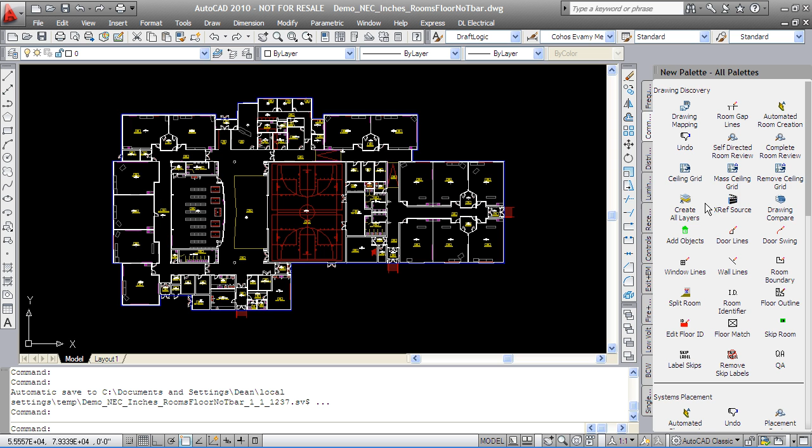So the first tool we'll look at is our mass ceiling grid tool to quickly put ceiling grid into the rooms that need it. We simply select the horizontal and vertical size of the grid, advise DraftLogic that we want the middle of each room used as the start point of its grid pattern, and that we want a zero rotation angle for all the grids.

DraftLogic Electrical goes through each room in the drawing and puts grid into only those rooms that need it. We see here we have a classroom that specified a ceiling type of T-bar. A neighboring room, this vestibule, specified instead that it had a ceiling type of drywall, so no ceiling grid was applied.

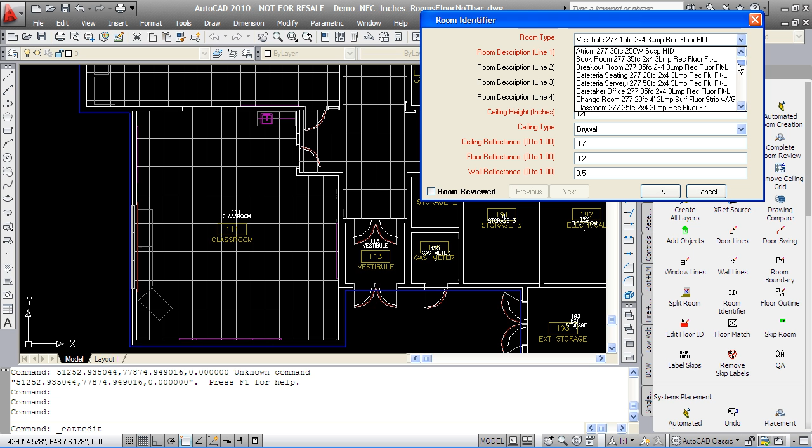Room types have been assigned to each room to let DraftLogic know how you want it treated. In this list here for the school, we've got a subset of our over 1,450 rooms available for selection.

Let's see how our room type selections affect DraftLogic Electrical's automated placement function. Automated placement will go through the drawing to each room that you have set up, and depending on which systems you choose to execute, in this case we're going to ask for both fixtures and receptacles to be executed.

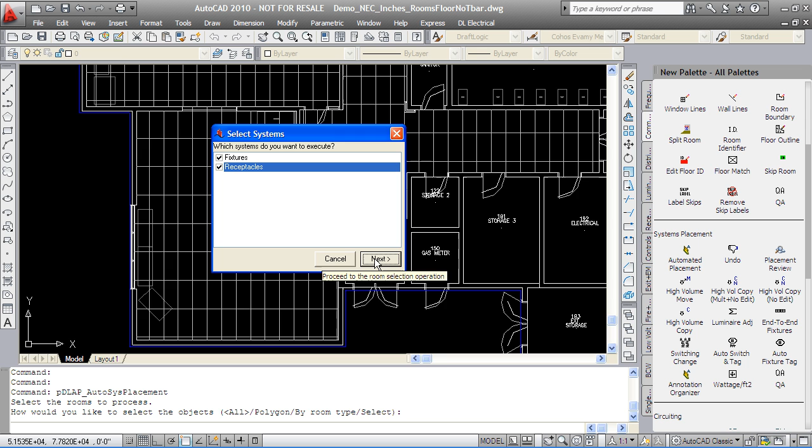And then based on what we've chosen in our room library, it will go through and place the lights and receptacles that we have requested.

So here we are now with automated placement complete. It took 2 minutes and 21 seconds to put lights and receptacles into 73 spaces.

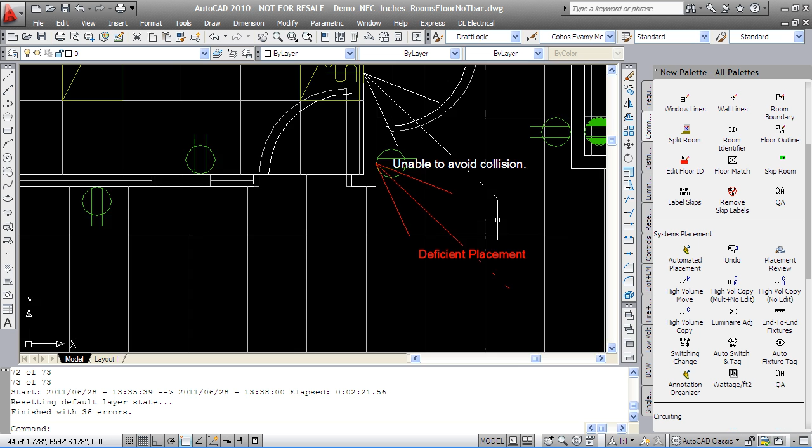Where there was a situation that DraftLogic Electrical was unsure of one of its placements, it has marked it with what we call an error or warning arrow to let you know to take a look to make sure you're happy with the placement. So how did DraftLogic Electrical know how to treat each space?

Let's take a look at one of our classrooms. We'll use our Show Room Record tool to call up the room library. As I mentioned before, we have over 1,450 room library definitions ready to go for you. They're all shown in this list.

But we're interested in this classroom's definition. So for this classroom, we selected a recessed fluorescent flat lens to be used for the foot candle based lighting and to light the space to 35 foot candles.

Calculations were made using the reflectances that were individually decided for the room, plus the characteristics of this particular fixture. And we can click on the View Detail button to get a quick view of it.

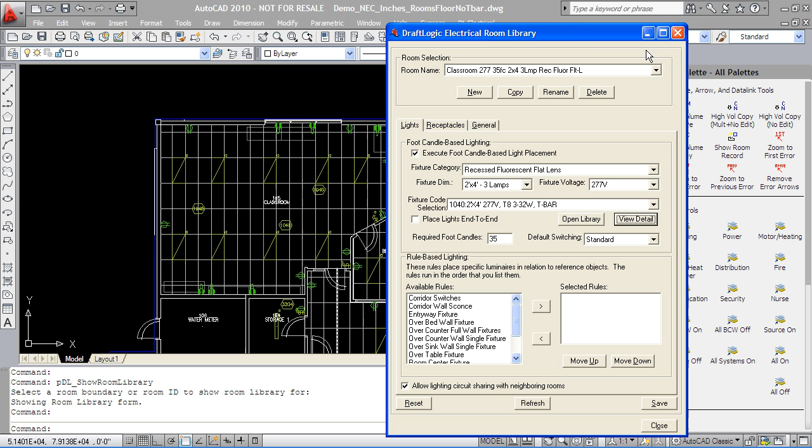We didn't apply any of our lighting rules in this particular room, but there's a number of them to choose from. And our receptacles, for the room perimeter, we chose to have duplex receptacles rated at 100 watts with a maximum distance between them of 240 inches.

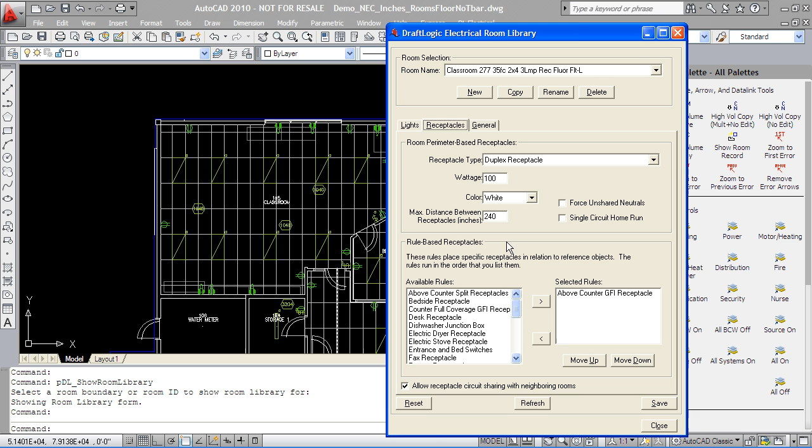We also applied an above counter GFI rule. You can see here that each of the counters received a GFI receptacle with a load of 1200 watts. We can adjust this as we desire.

And here's one of our room perimeter receptacles at 100 watts. And again, we can adjust this as desired.

So there's the results of automated placement. If you want to change those results, we have some high volume move and copy tools to make it quick and easy to do it.

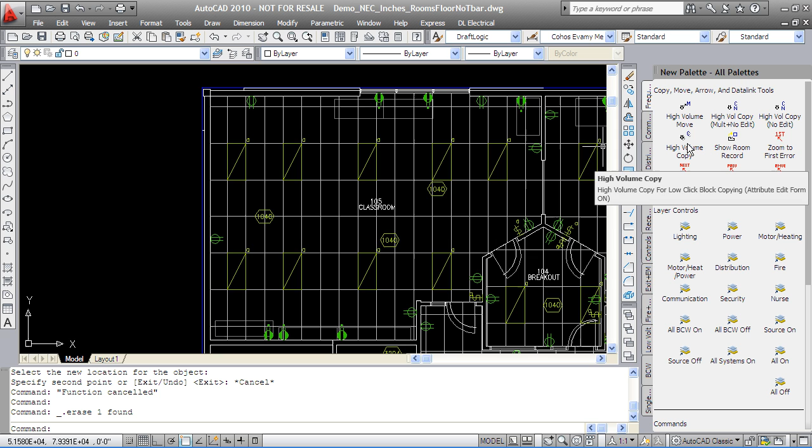These high volume tools know what kind of block you're picking up and what mounting style it has. So there's some intelligence here.

For example, if I pick up this luminaire and move it into a neighboring cell, all I have to do is just click anywhere in the cell, and DraftLogic Electrical will automatically snap it into the cell for me.

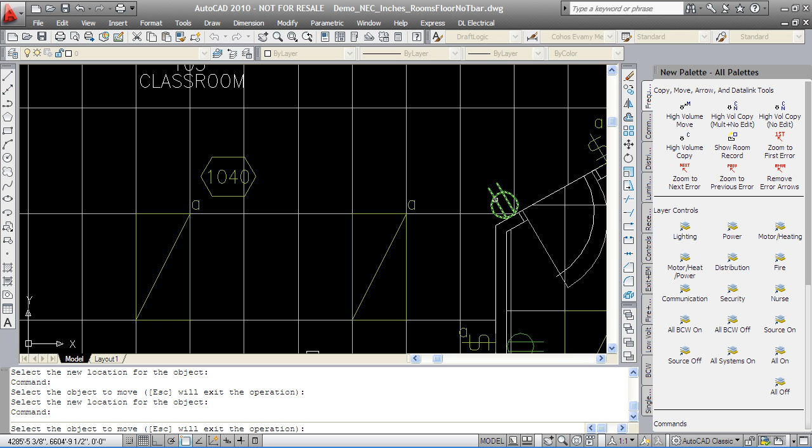If I want to move this receptacle onto this slanted wall face by the door, I just click anywhere near where I want it to go. It'll find the nearest wall, snap to it, and match the rotation of it.

If you want to tweak how the lighting was applied to one particular space, so you don't want to rerun all your classrooms, you just want to rerun one, then we have a luminaire adjust tool.

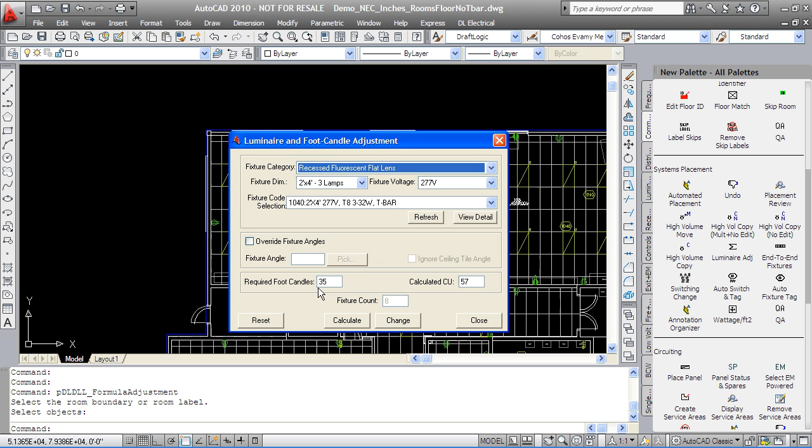So I select the room that I want to affect. Let's say I want to have this room lit to 50-foot candles instead. I could change the fixture type, I can change the foot candles, I can change the rotation angle, I can force a different coefficient of utilization.

In this case, I've just changed the foot candles, and as you can see, I ended up with another row of luminaires to increase the lighting level in the space.

This is a good time to mention that we are running DraftLogic Electrical straight out of the box. Everything that you're seeing is as installed. There's no configuration necessary to do any of what I'm going to show you today.

This is unlike many other design products that require anywhere from tens of hours of configuration to hundreds of hours of configuration, and still don't achieve anywhere near the productivity gains that DraftLogic Electrical offers out of the box.

Automated placement is a process that helps the designer get the right devices in the right places, but doesn't paint the designer into a corner. The designer has complete control over where luminaires and receptacles end up and their specifications.

To place additional devices and other systems, we have tool palettes: one for luminaires, one for receptacles, controls, fire and emergency and exit, low voltage, and branch circuit wiring.

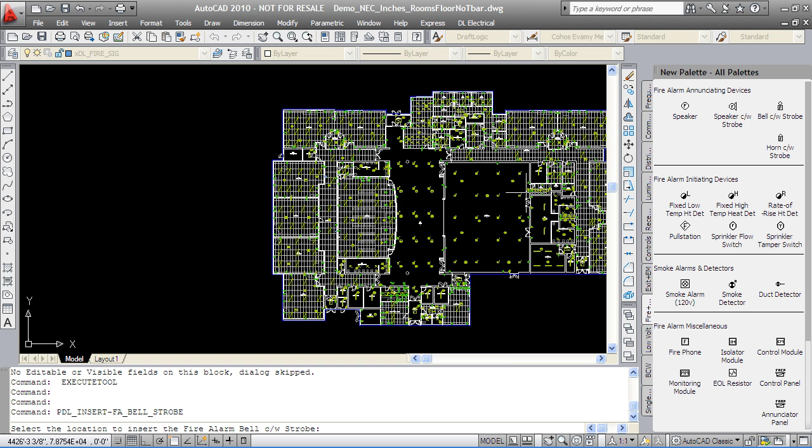That's how all of the blocks in DraftLogic Electrical work. They're intelligent, and they're going to help you go to where you want them to go.

Looking at the high volume copy tool, there are three versions: copy with edit, copy no edit, and copy multiple units with no edit. So if we wanted more of these receptacles on this curved wall, I can just grab it.

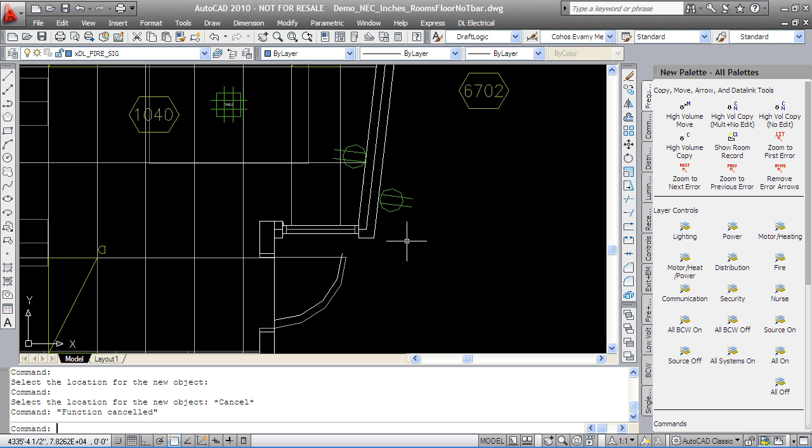And as long as I'm within my tolerance, it'll snap to that wall automatically.

You can see all of the receptacles that I placed were snapped and rotated to the wall — bang, bang, bang — and they all have the desired attributes completely filled out.

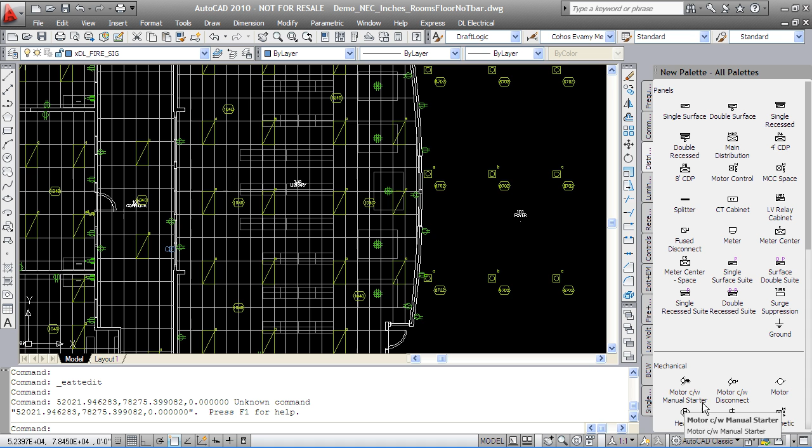Another variant of the tools that DraftLogic Electrical provides to speed your design work is auto reload. For example, if I wanted to put an HVAC motor, I select it off the tool palette, locate it in the drawing, and the attribute editor dialog comes up automatically.

Every block in DraftLogic Electrical that has value in having a unique name — this includes motors, all the distribution devices, emergency battery packs, etc. — will have a unique name automatically generated for it. You can replace it if you like.

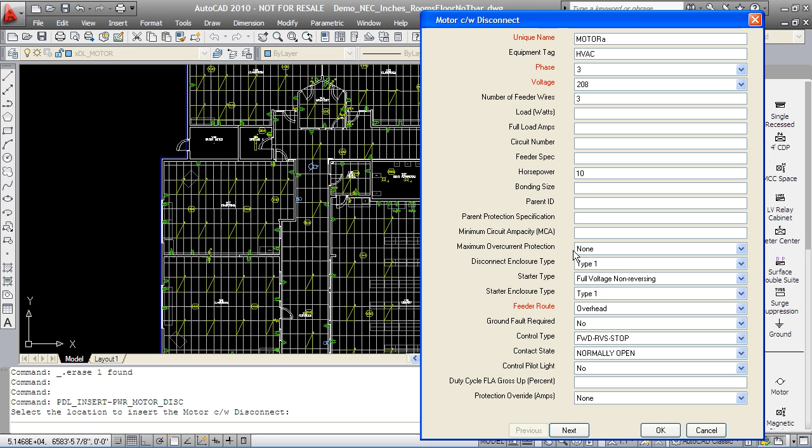I'm going to give it a description, which will show up on the drawing, optional, of HVAC, and supply a horsepower rating for this particular one. Skimming through the rest of my values, I'm happy with them.

Auto reload places that same block ready to go again with one click, and it also rolls forward my last used attribute settings. The unique name, of course, is automatically different, but everything else is ready to go again.

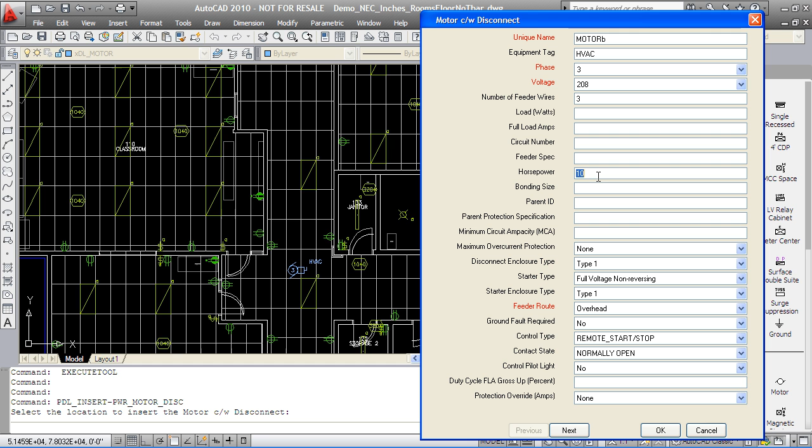So I can change what I need to change, keep what I want to keep, and very quickly place a number of blocks that are repetitive or near repetitive into my drawing.

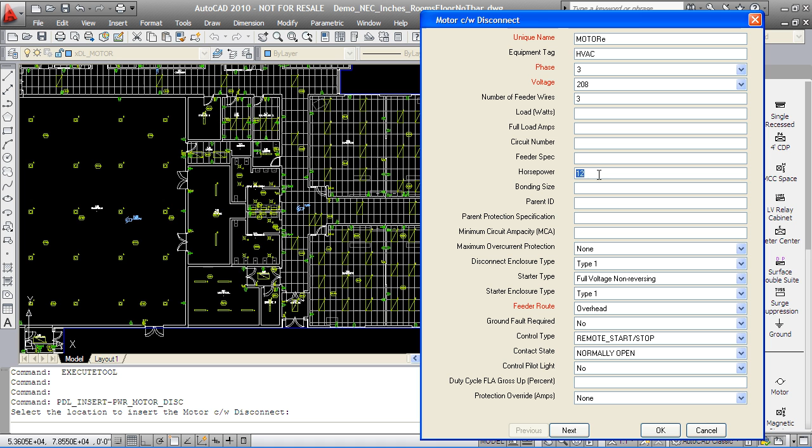Once you have your devices in the drawing, you are ready to proceed with automated circuiting. During automated circuiting, DraftLogic Electrical will travel through each area that you decide is to be circuited to a particular panel or panel room, and assign circuits on either a compatible existing panel with available circuits, or place new panels as required.

To service the area, setting up service areas is very quick and easy. First, you decide which type of service area you want, whether it's mixed or segregated, meaning lights and receptacles to the same panel room but on separate panels.

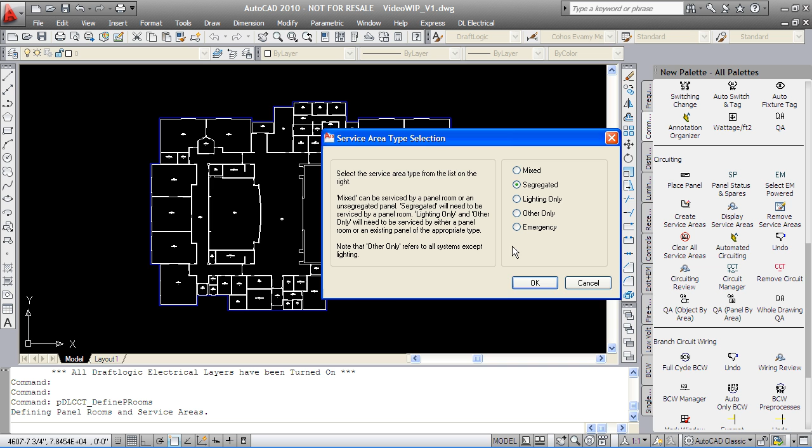You choose the room that you want to be a panel room and where in that room you want panels to automatically be placed.

Then you choose the area that you want to be circuited, either by using existing boundaries or drawing your own new one. I'm just selecting the room boundaries here.

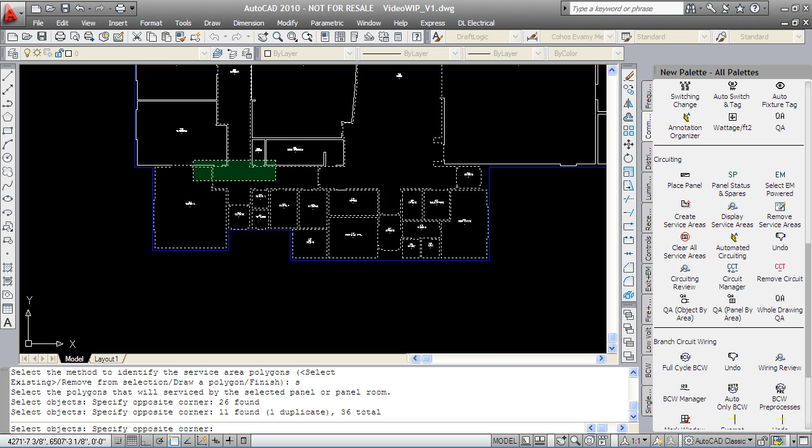DraftLogic Electrical gives you a preview of what you've selected. You can finish that off and select a new one. I'm going to load a drawing that I've completed this process on.

We have a tool to show how the circuiting is looking already. You choose the panel room, and it colorizes the drawing based on what areas are assigned to that panel or panel room, and by color it tells you what services it's going to handle for that area.

So here we have blue, which is other only — things like receptacles, heaters, small motors — going to this room here.

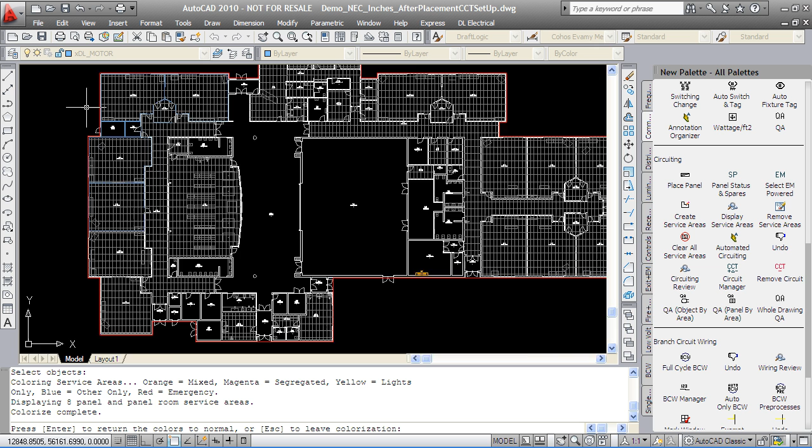And in this room up here, this panel room, we have all of the emergency devices for the whole building footprint, plus the power heaters and small motors for the northwest corner.

Let's get automated circuiting running. To get it going, we just select the automated circuiting button on the tool palette, tell it to run on all. There are some questions about whether we want to keep some prior selections or not.

And away it goes. The path of travel that automated circuiting follows within an area is a modified traveling salesman path, to optimize circuit groupings on the panel for ease of construction.

The decision of whether to share a circuit with a neighboring room or not is based on available capacity remaining on the circuit, the load of the compatible devices in the neighboring room, and finally, but most importantly, whether you, the user, has indicated that sharing is allowed between these two rooms in the room library.

Groups of circuits are used in 2s for single-phase panels and 3s for three-phase panels in order to maximize the opportunity for neutral sharing, when allowed, and thus reduce construction time and materials costs. Small motors will be serviced by the same panels and same circuits as receptacles of compatible voltage if you decide to allow DraftLogic Electrical to do that. You can also decide to have all motors circuited separately. Heaters will circuit to the same panel rooms as receptacles. Large motors will look to the project parameter wherein you, the user, decide to direct them to motor control centers, the main distribution panel, or regular branch circuit panels that also service receptacles.

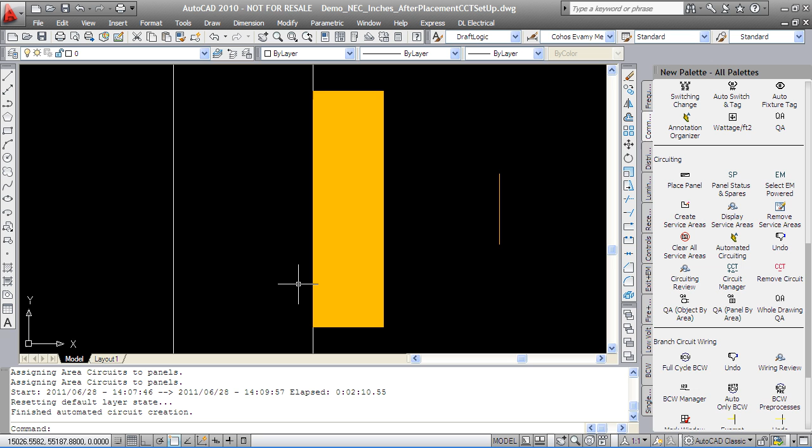Okay, automated circuiting has finished. In total, 2 minutes and 10 seconds was spent to circuit the entire building.

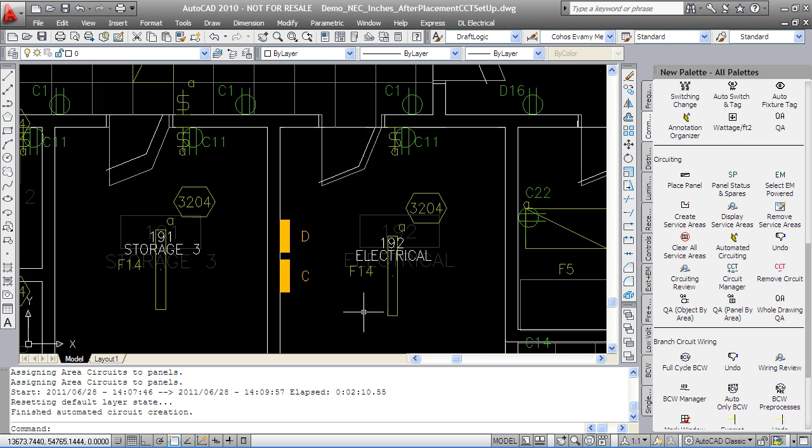We can see that in our main mechanical room, we have some new panels that were automatically placed. In the southwest area electrical, we've got a couple panels, and same as in the storage room where we opted to route our emergency and northwest corner services to.

These panels have robust attributes including a unique name that's been automatically generated, a specifier of what panel type they are, and opportunities for the designer to override any later decisions on protection and feeders.

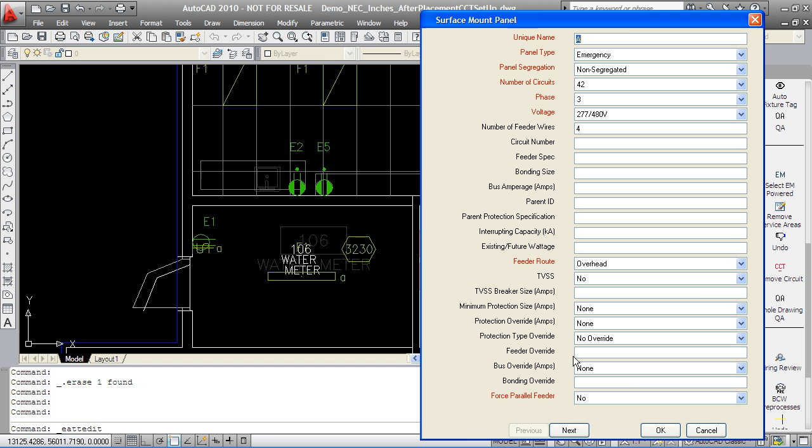Where there was any sort of problem with automated circuiting, DraftLogic Electrical has placed a warning or error arrow. For example, here we had a stove that was specified to be 240 volts, but in our design parameter for this project we only allowed 120/208 volt panels. So of course we couldn't service this 240 volt kitchen special receptacle.

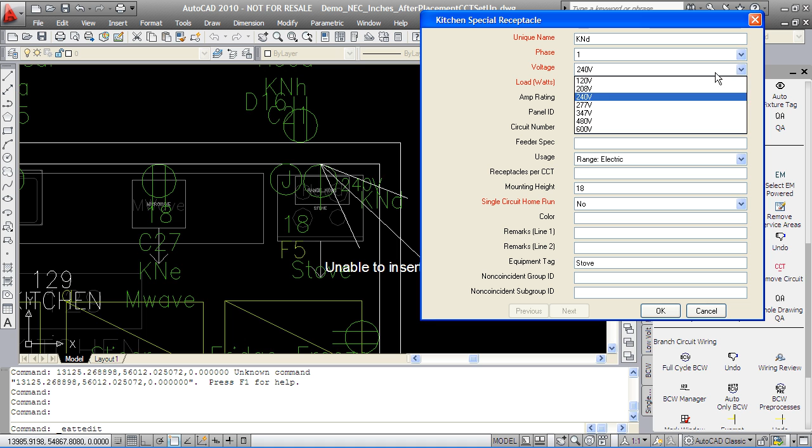The solution is easy. We change it to 208 volts, call up our circuit manager, which can be used to create circuiting completely manually. It can be used to delete automated or manual circuiting, or modify automated or manual circuiting. In this case, we're going to service this stove from the same panel as its neighboring devices in the kitchen. We are automatically directed to the first available circuits in the panel. Looking down the list, we can see the prior circuits have been allocated.

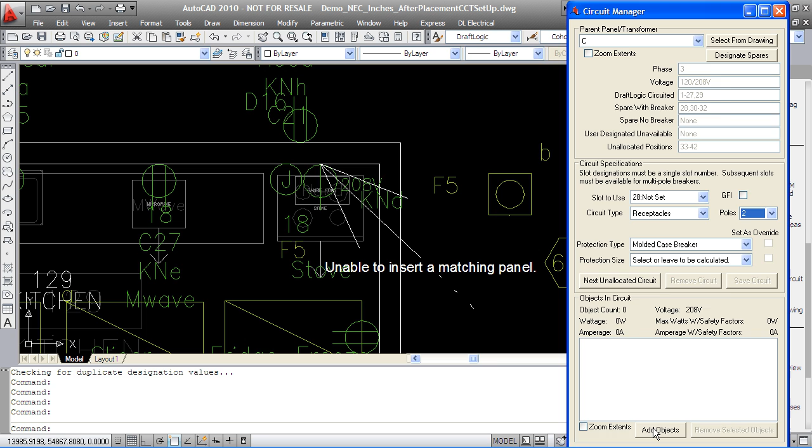So select a 2-pole, let DraftLogic Electrical figure out the protection size, and add the stove receptacle. We get a running total of how many watts and objects we've selected in AutoCAD. When we're done, we right-click to go back to our circuit manager, where it has automatically selected protection size for us and let us know about the various specifications of this circuit.

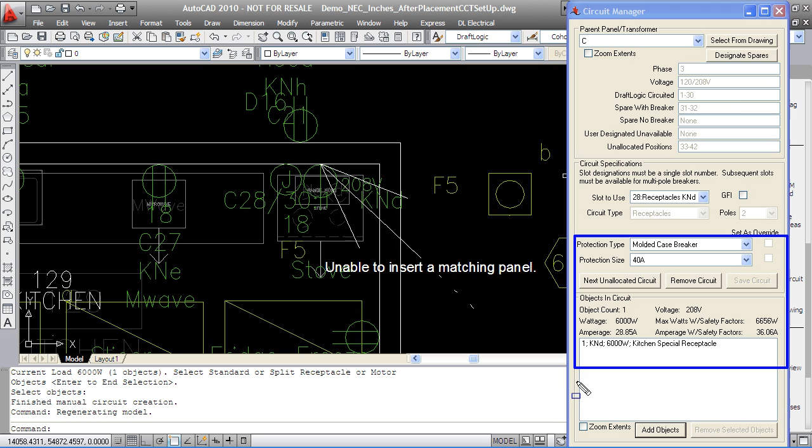Completing the electrical services for this building is as quick and easy in DraftLogic Electrical as everything else you've seen so far. We just grab what we need off of our tool palette, throw it into the drawing, and use the circuit manager to create relationships between the various devices.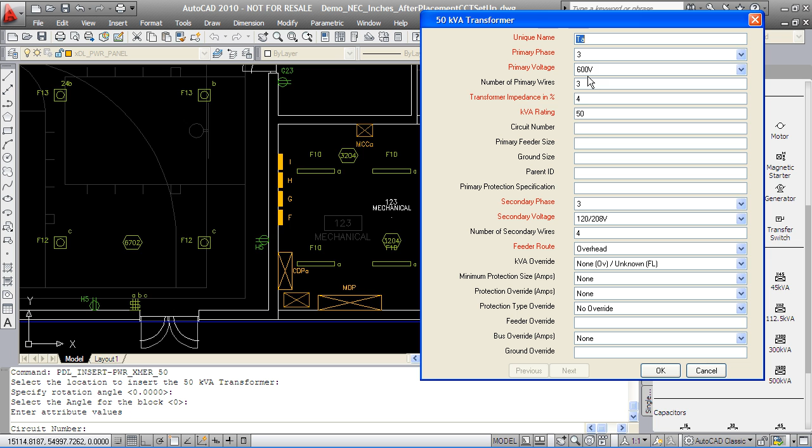So for example here, I've set up to circuit the 120 volt equipment to my CDP. It's defaulting to a child panel, 3 poles. I can add these 120 volt panels very quickly, and I would carry on so forth with the transformer to get the CDP services to the MDP, etc.

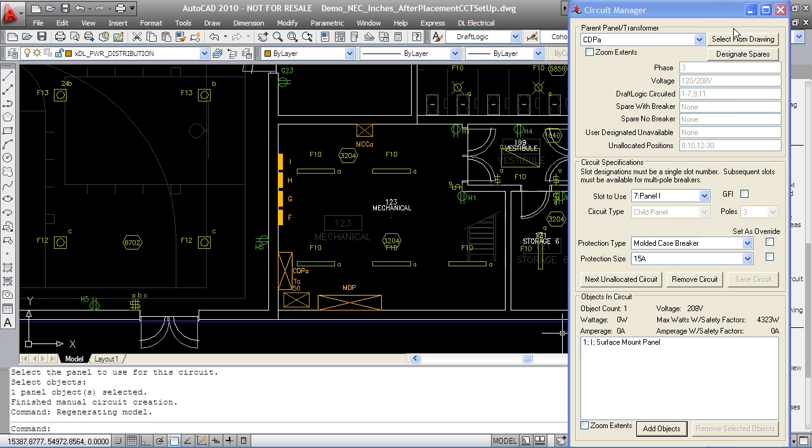Let's quickly generate the panel schedules and single line diagram for this project after I've completed associating the distribution devices to each other. I'll just go to my report wizard and select the panel schedule and single line.

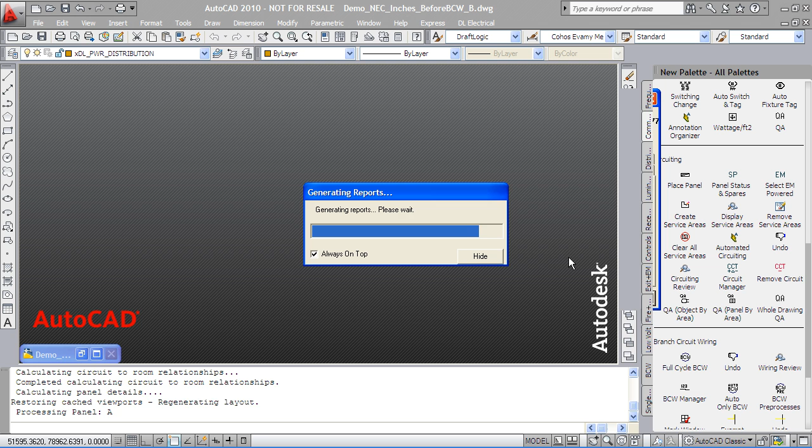DraftLogic Electrical is now completely automatically generating panel schedules and single line diagrams from scratch. This is how DraftLogic Electrical does all of your schedules, completely automatically. No need for you to set up any scheduling, no need for you to put down any blocks, fill in any attributes, nothing. All of it is completely automatic. So after just a minute or so, DraftLogic Electrical has completed the panel schedules and single line diagram, as we can see here.

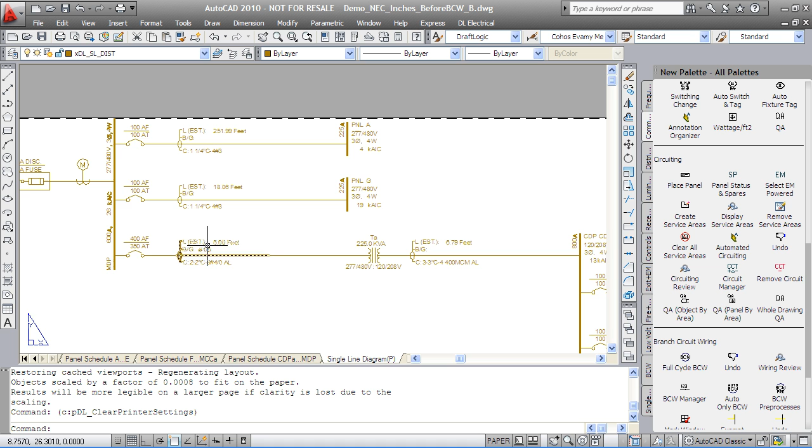So here's our motor control center and various panels connected to the CDP being fed through a transformer all the way to our main service, and then the various panel schedules. DraftLogic Electrical looks at all panel-like devices as panels in order to be able to create these schedules.

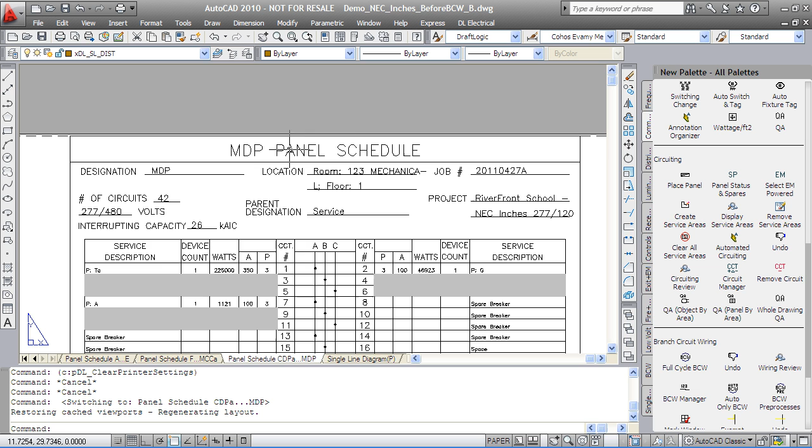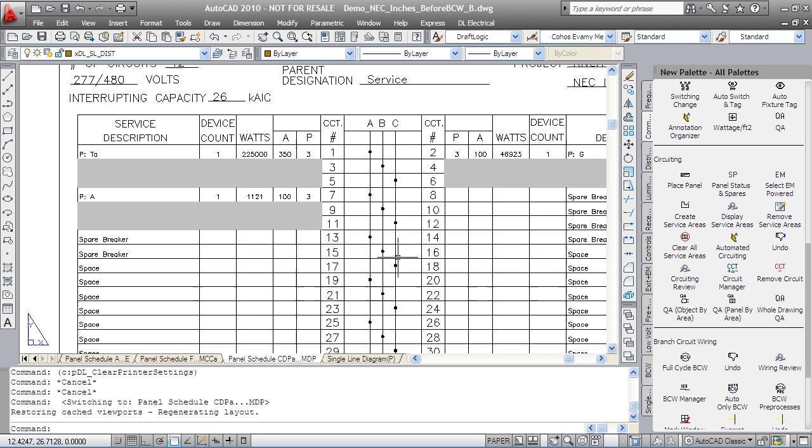They have a header with lots of information about where the service is, its name, voltage, interrupting capacity, and a center section with the detail on each circuit, and then finally a lower section where there's lots of detail on the loads, how they were broken down, and the resultant protection and conductors.

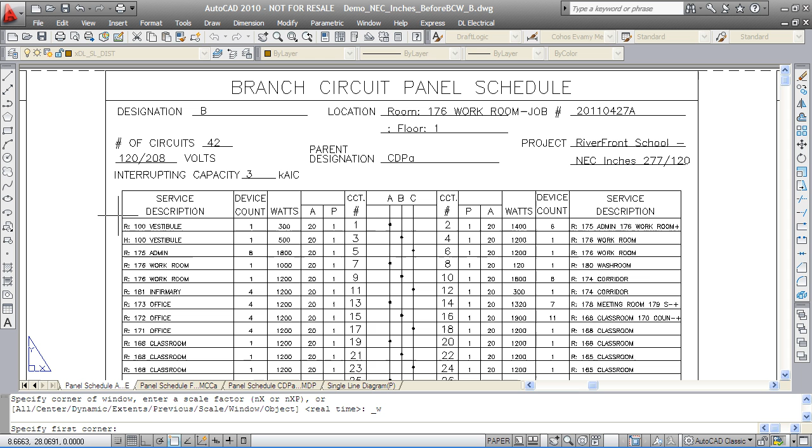So if we look at a regular branch circuit panel, we can see in the detail section that we're told which room the circuit is in, a single letter identifier to tell you what type of circuit it is, how many devices are on the circuit, the total wattage, and the amperage of the protection and how many circuits it's taking up. And again at the bottom, as we looked at before, all of the calculations, numbers used in the calculations to determine the conductors and protection are shown.

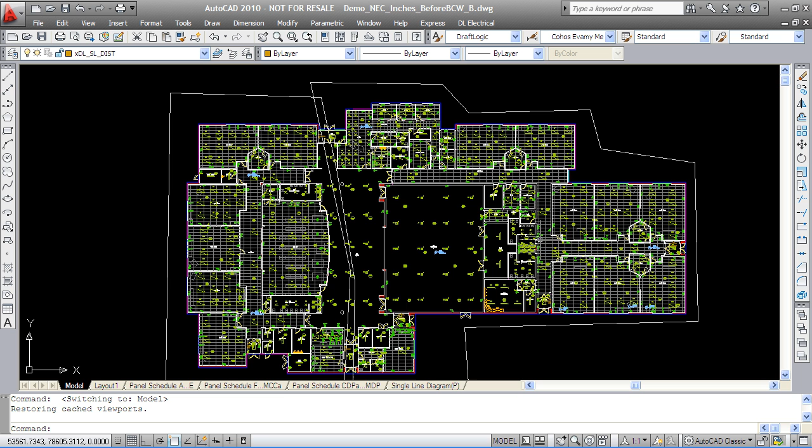Okay, so how do we deal with the ever-present and ever-reoccurring changes requested by other consultants on the job and the client? Let's say, for example, that the mechanical consultant desires to change the horsepower rating on one of the motors. So instead of this motor being a 15 horsepower, they've requested a 20 horsepower. They also want an additional HVAC motor.

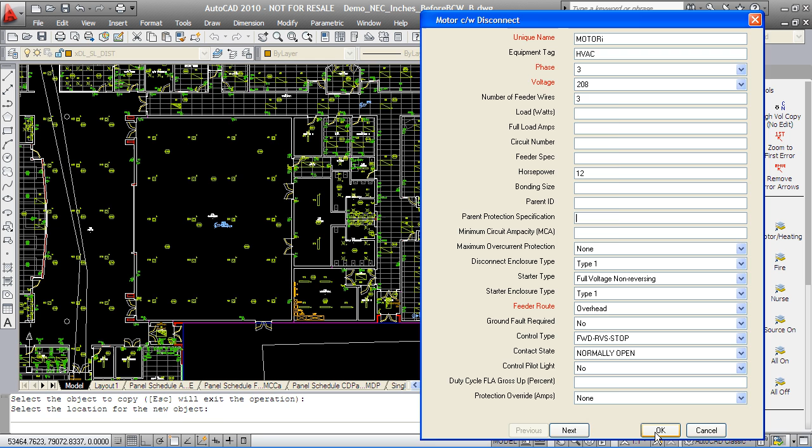So we'll just copy one of the existing. It's given a unique name automatically, and we can change the horsepower on it to whatever was specified, and we'll let our protection and feeder recalculate. Whenever you rerun any of the schedules that depends on protection and feeder calculations, those are all redone all the time. So you don't have to worry about updating them manually yourself. You just rerun the schedule and you get the most currently calculated values for that.

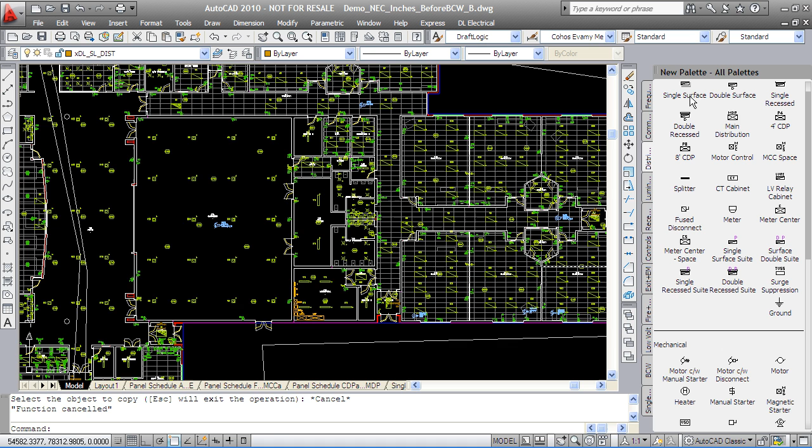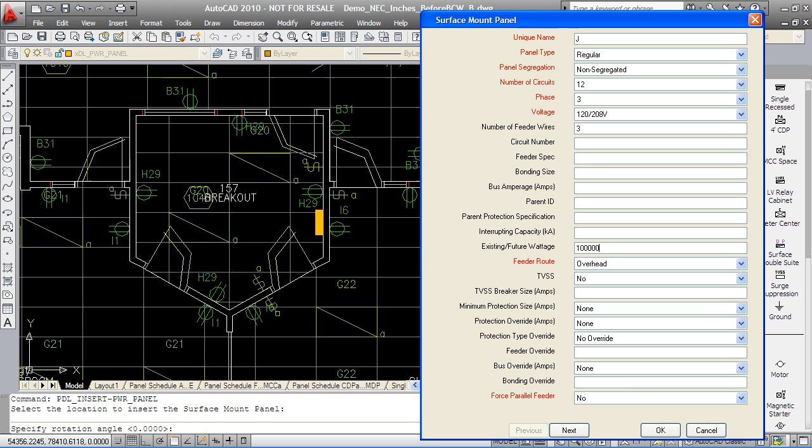Finally, let's add on another panel. The client has advised that at some point they may put some portables onto the east end of the facility, and they want to have a panel available to service that. So since this panel won't have any load today, we're going to give it a presumed future load of 100 kilowatts, and then we just need to circuit it.

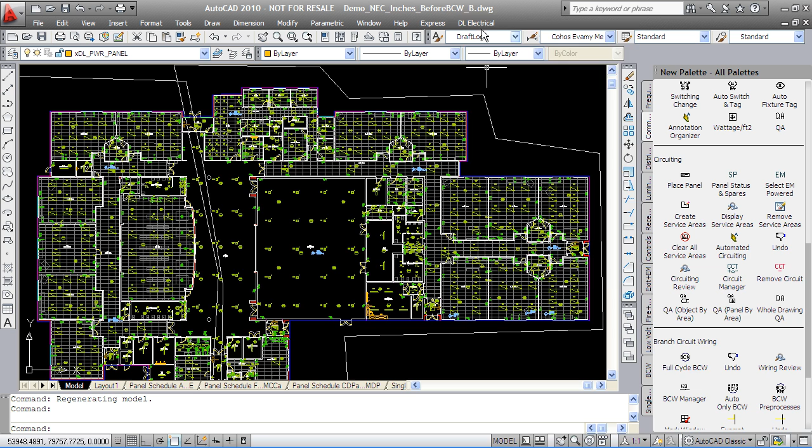So now you can see we've assigned a circuit to our new motor I. This motor and the motor that we changed the horsepower on will have their protection and feeder calculated next time we run a suitable report. So let's rerun our panel schedules and single line. For comparison purposes, we're going to retain our old single line. So do we wish to overwrite the prior versions?

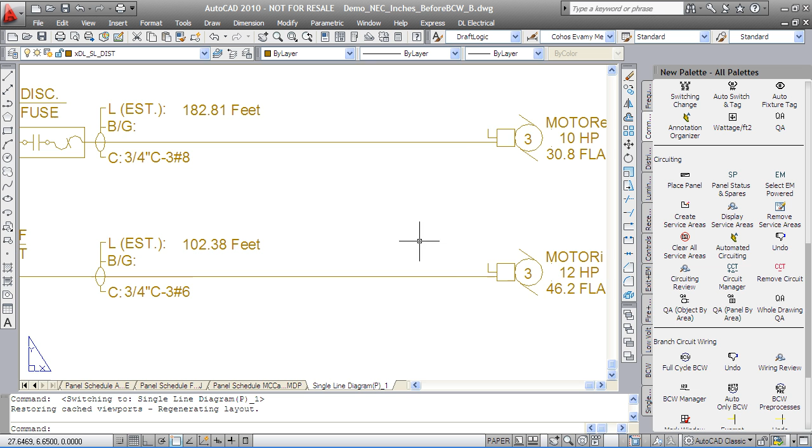No, let's keep it. And we'll see how it's changed given that we've added a new motor entirely, we've changed the horsepower of an existing motor, and we added that panel to the east side to be able to handle future portables. So here's our new single line. We have an additional motor. We have our additional J panel. We can see that the services across the transformer have increased, but that the added load was not enough to push an increase in our main service.

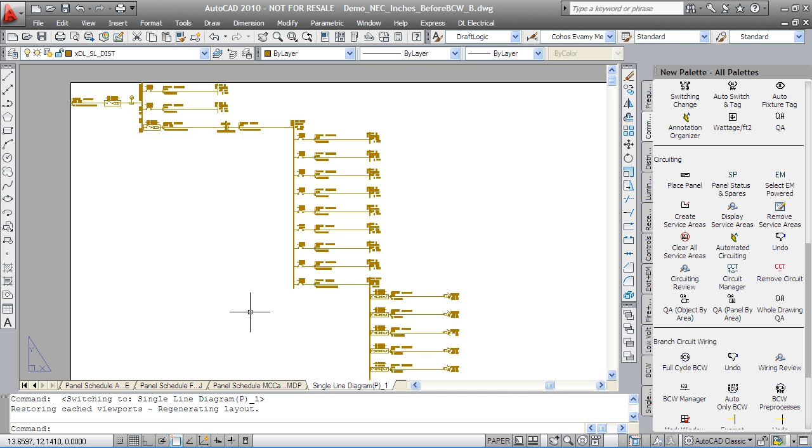So all of that was completed in a couple minutes. We can probably all agree that it would take much longer to achieve these results using traditional methods. With circuiting complete, we are ready to add the branch circuit wiring to the drawing. Automated branch circuit wiring is driven by the selections the designer makes in the project parameters insofar as whether to use conduit and wire or a metallic or non-metallic cable.

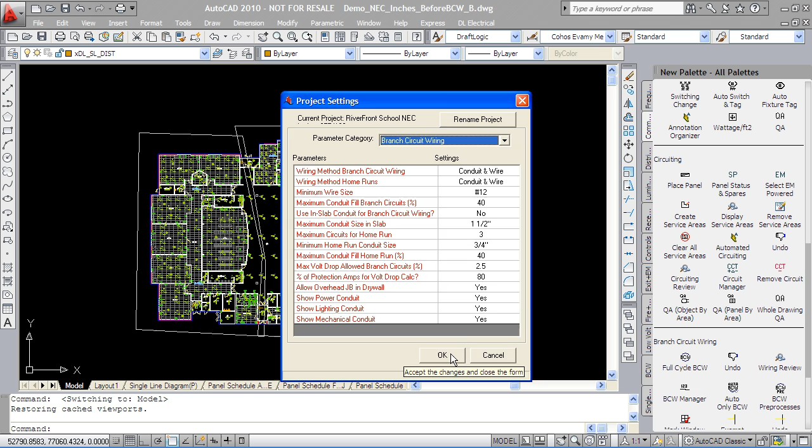There are over 10 other parameters that tell the expert system how to perform the branch circuit wiring. For example, the maximum number of circuits to gather for a home run. The designer can select as few as one circuit to perform automated branch circuit wiring on with a particular set of parameters, or the whole project at once. Today we are running the entire project in one pass. In just a minute or so, automated branch circuit wiring has completed.

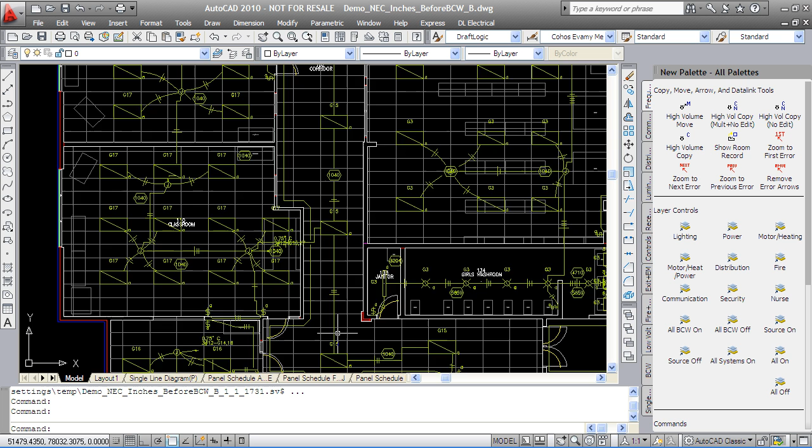As you can see, it has drawn the whips from the fluorescent lights to central junction boxes, connected those junction boxes with conduit and wire, added wire count symbols, and added the home runs. We have all systems represented. Here's the power, lighting, motors.

After only a couple of minutes, a full swath of reports is generated. The first reports are floor plans. I drew some cut lines here of how I wanted my floor plans broken up, and you can see that there's been layouts set up using each of those cut lines for each system.

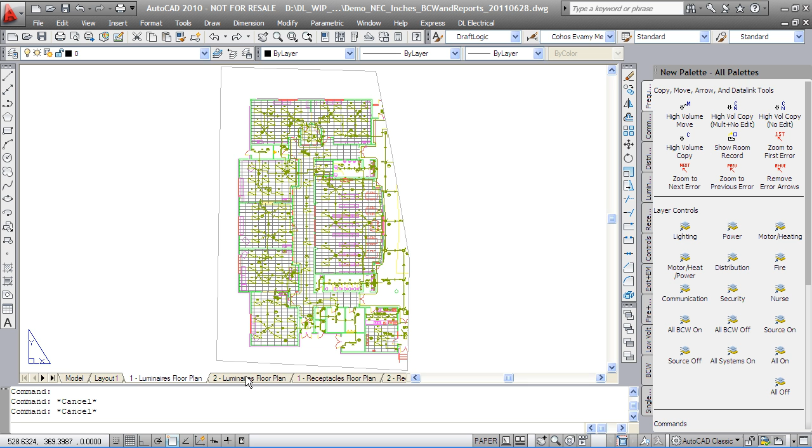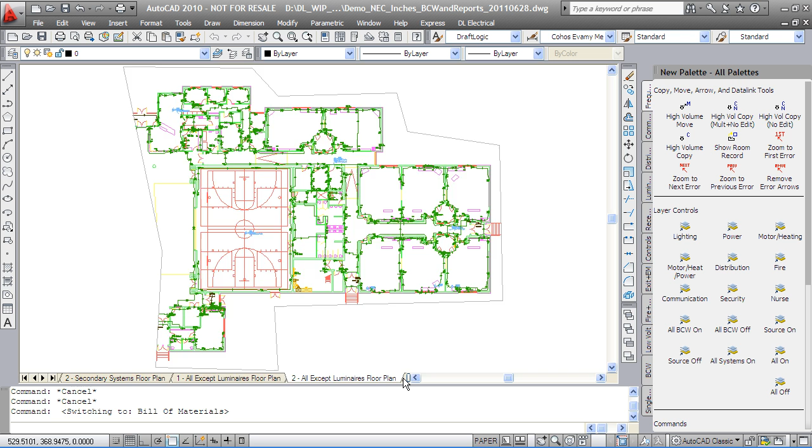So I've got the west half and the east half for luminaires, west and east for receptacles, motors, and a variety of other ones combining motors and receptacles or secondary systems or everything except luminaires. Next we have a bill of materials.

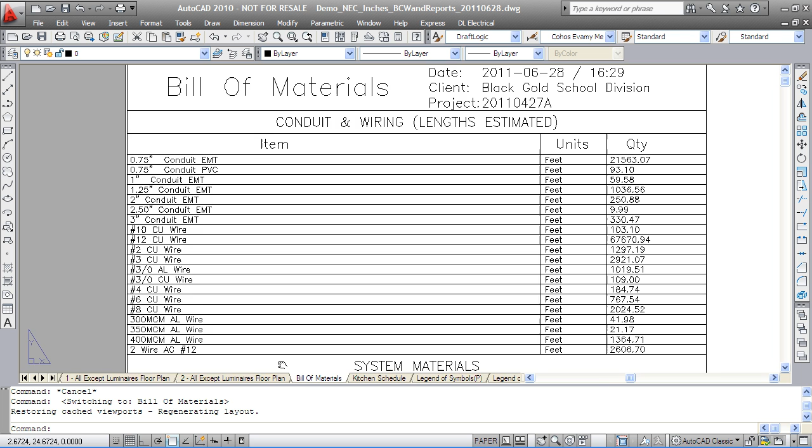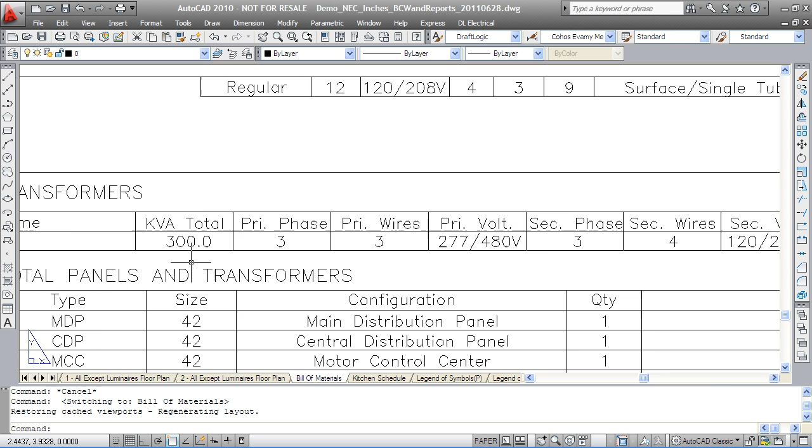It shows our conduit and wiring lengths with total footages, system materials with total quantities, panels and transformers with their interrupting capacity requirements, the protection needed for them, and some other information about each panel, transformers, and finally a summary table of panels and transformers, and then a summary table of protection, breakers and fuses, the interrupting capacity rating required for each.

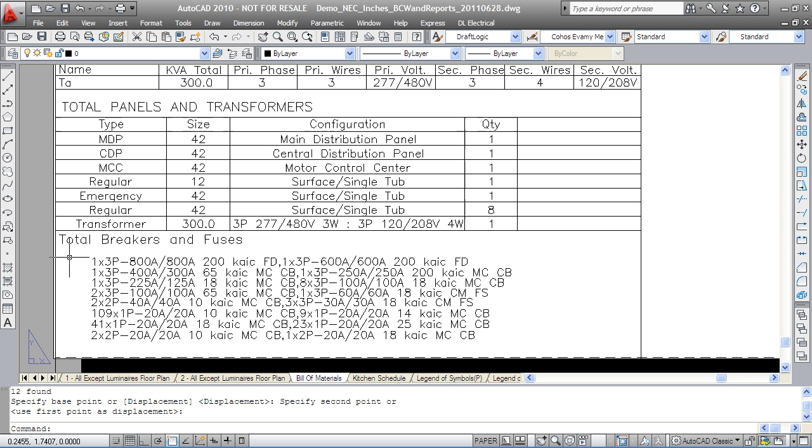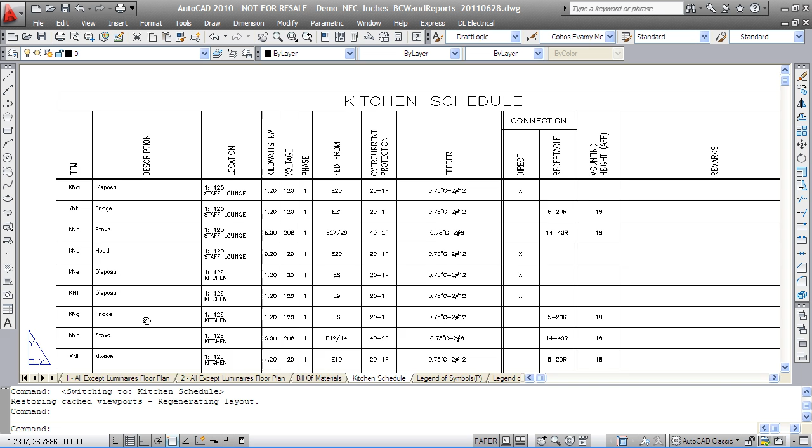If you used any kitchen style receptacles, you get a kitchen schedule that itemizes all of those devices. We have a legend of symbols that shows you only what was used on the project. So instead of dumping that 200 or 300 item legend of symbols on each and every project, large or small, you can have a custom one that only shows you what was used. We have a portrait version and a landscape version.

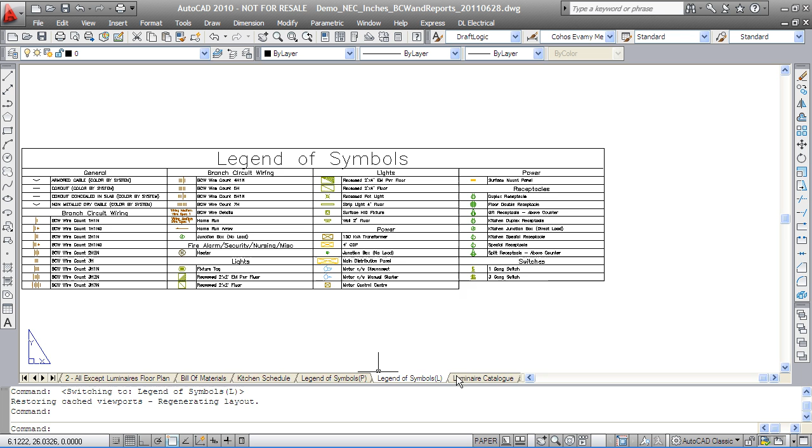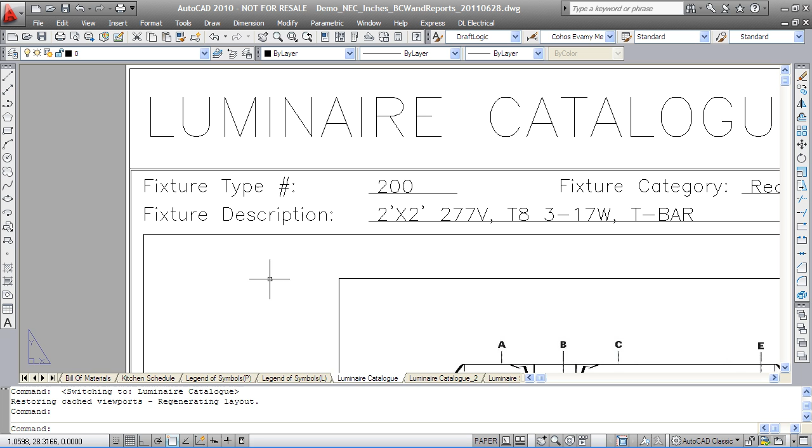The luminaire catalog shows you a lot of information from DraftLogic Electrical's luminaire library for your clients to see what type of luminaires have been used in the project. This fixture type number ties into the luminaire schedule and into the luminaire tags on model space. If we flip back to model space, we can see the luminaire tags here. This number ties into the luminaire catalog and luminaire schedule. So returning to the luminaire catalog, we can see that a variety of information has been drawn from the database and presented for your clients.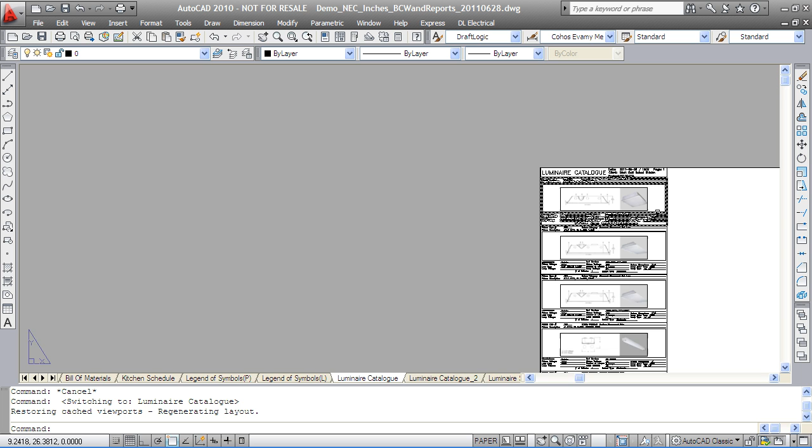All of these reports can of course be sent to any size of sheet that you desire. For my purposes, I simply used architectural E-size for everything, but you can of course send certain reports to certain sizes of paper and other reports like your floor plans to the larger sizes.

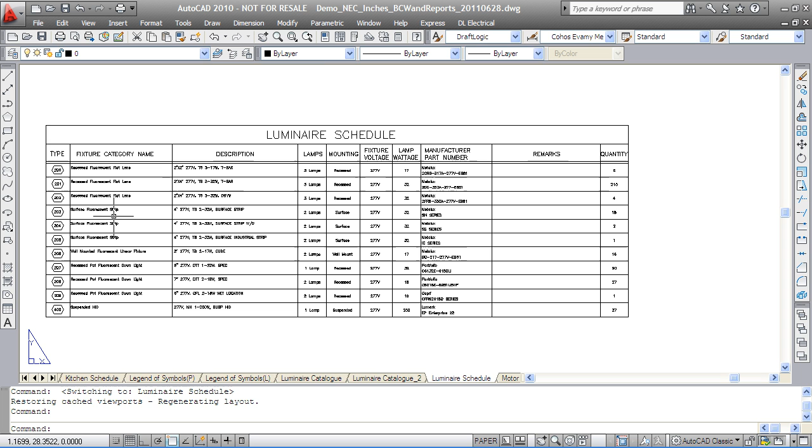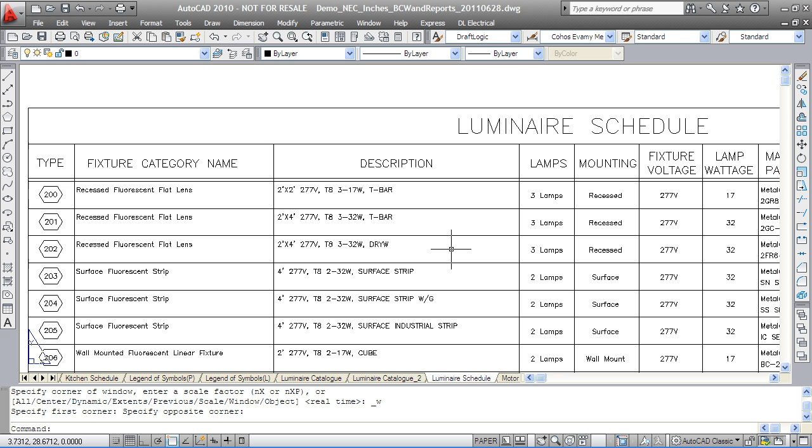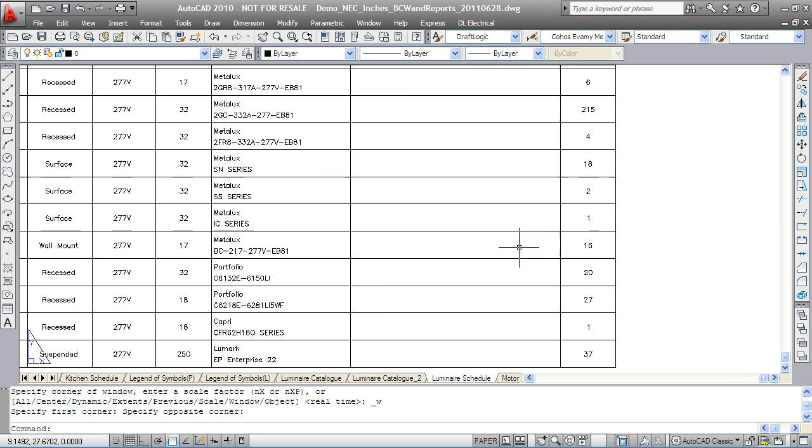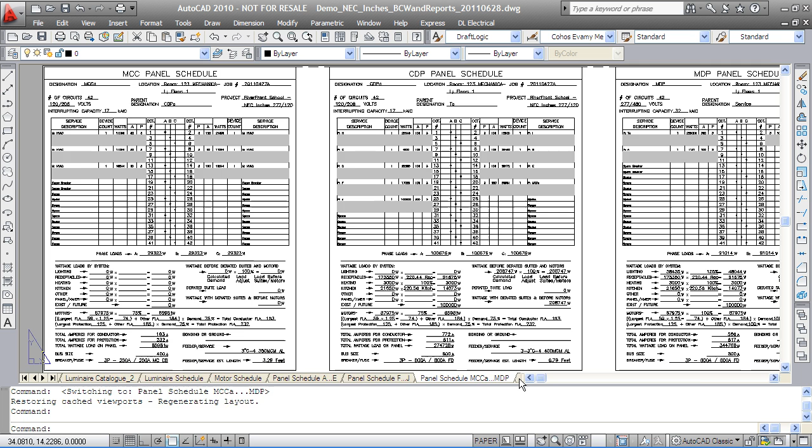Here we have our luminaire schedule, which gives you a summary of each luminaire used on the project, the type number tying into the luminaire catalog and the luminaire tags on the drawing, a description, number of lamps, voltage, and the quantities. The motor schedule, which by your choice can either be a motor only schedule or a motor and heater schedule, gives you detail about each of your motors, heaters, description, location, horsepower, feeder, comments.

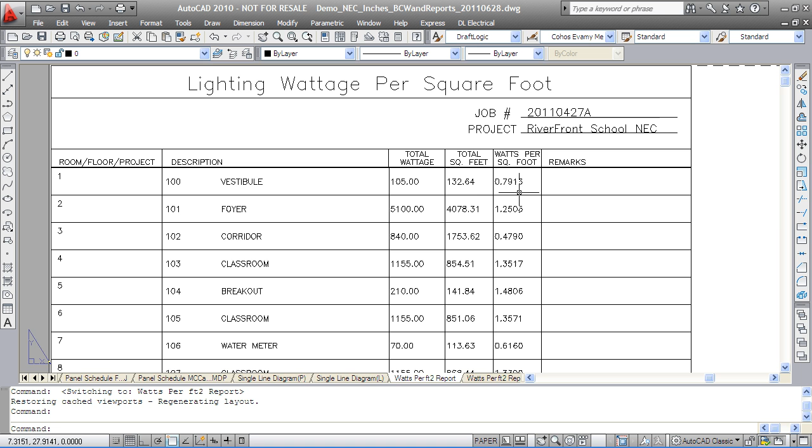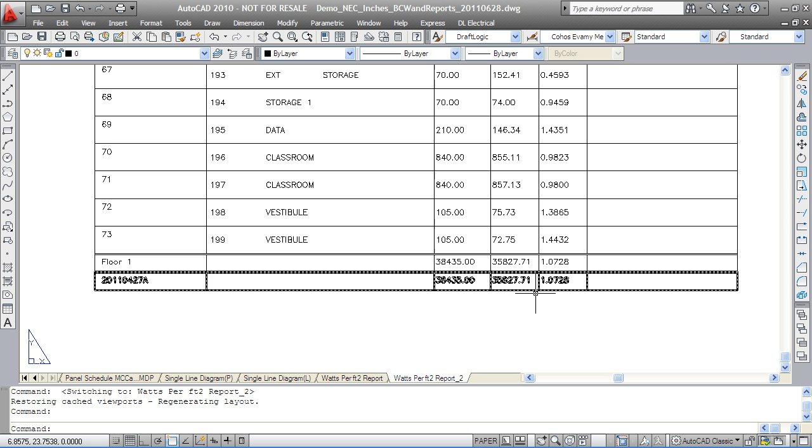Again, we have our panel schedules and single line, and then a watts per square foot report, which gives you information per room on the wattage, the square feet, and the watts per square feet, and then a summary for each floor and each project as a whole. Now, of course, I only have one floor, so my summaries are the same. So there you have the reports.

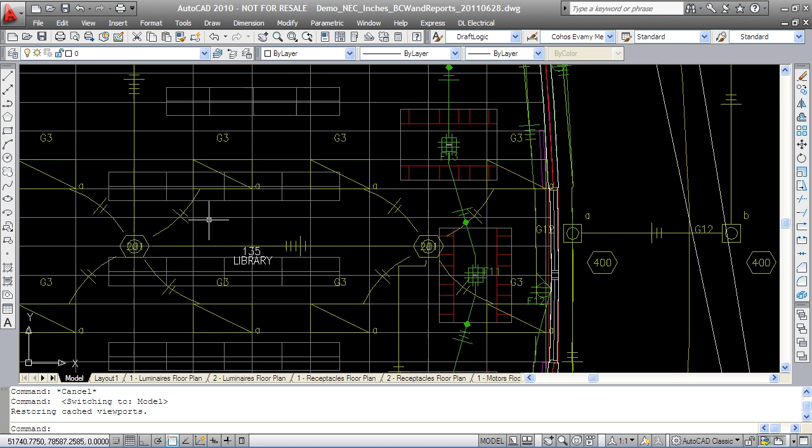Now that we've added all of our devices and branch circuit wiring into our drawing, things have gotten somewhat cluttered. You can see that there's some circuit numbers that have collided with the branch circuit wiring, etc. We have a tool to help you reorganize all that instead of having you sift through the drawing for days upon end moving things around. We have our Annotation Organizer. And what this does is automatically reorganizes all the attributes of all the blocks to minimize collisions. So let's just set it up and run that.

All the settings for the Annotation Organizer are under your complete control. So you decide how much buffer there is between the attributes and the block, the height of the attributes, the distance between each attribute of a block. You can have different values for switches than for other blocks. You can have the annotation for wall-mounted blocks run toward them instead of being at plan 0. And the ones that go vertical, you can choose to have them at plan 0 or not. And you can choose for the wall-mounted ones that are at vertical setting to be north or south.

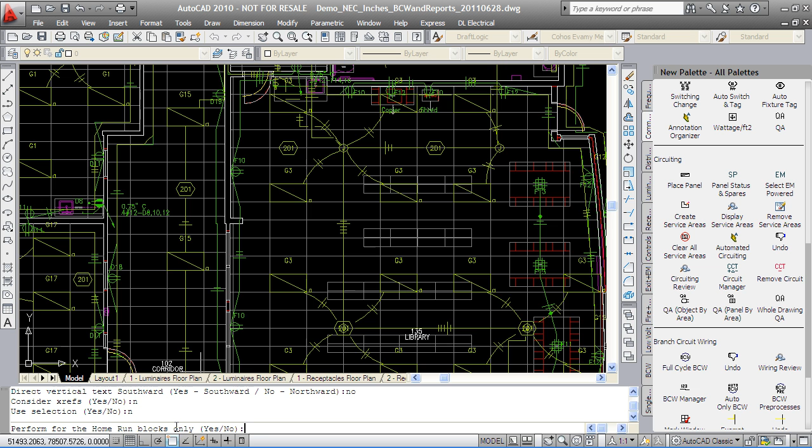XREFs can be part of the collision avoidance or not at your choice. You can choose to run it on one block, many blocks, or all the blocks. I'm going to run it on my entire drawing. And you can also just run it for the home run blocks or for everything. So in 78 seconds, the annotation organizer rearranged all of the attributes in the drawing. You can see that for the ceiling mounted luminaires, we have a preference of east side bordering.

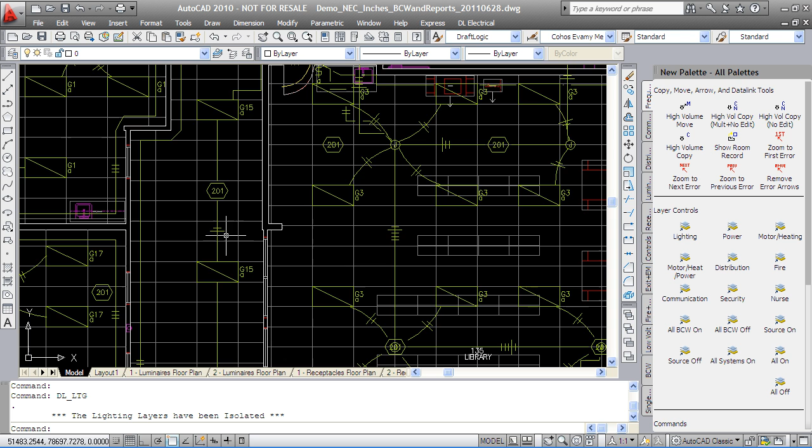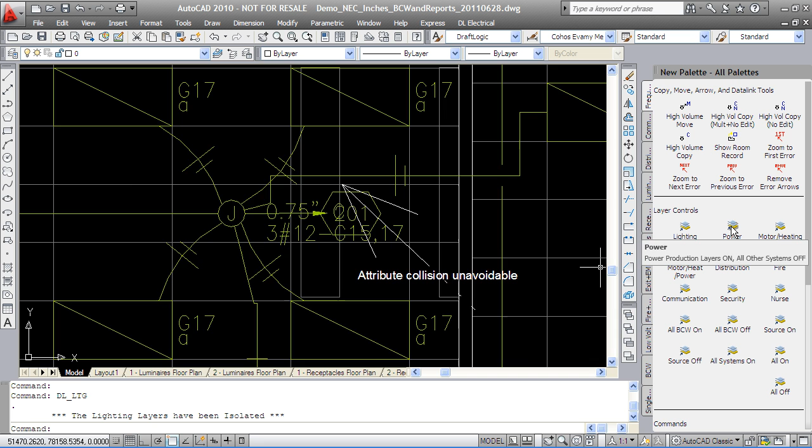So all the attributes for over 900 blocks were quickly rearranged. Where there was a situation that the automation couldn't resolve, you've been given an error arrow to help you find those places to fix them up. And here is the receptacles with the wall mounted, showing the orientation following the wall. And that's the annotation organizer.

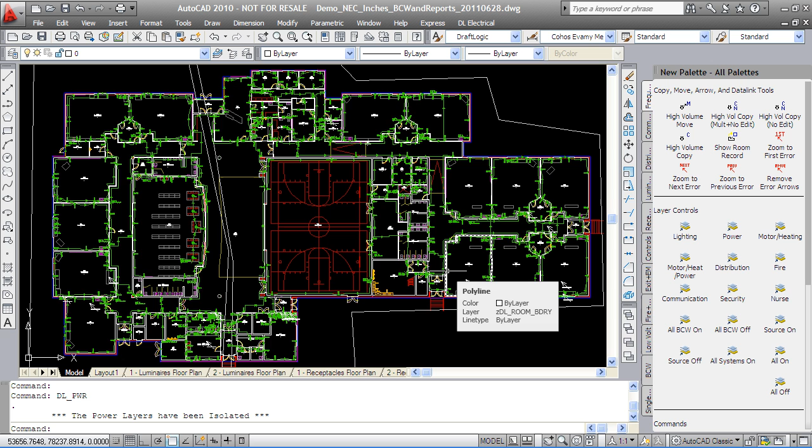Lastly, for those of you that are under pressure to use Revit on jobs, take heart in knowing that we have proven in a case study that it is faster, much faster, to still design in DraftLogic Electrical and then place only the devices that matter into the Revit model. You don't need to, nor likely do you want to, design from start to finish in Revit.